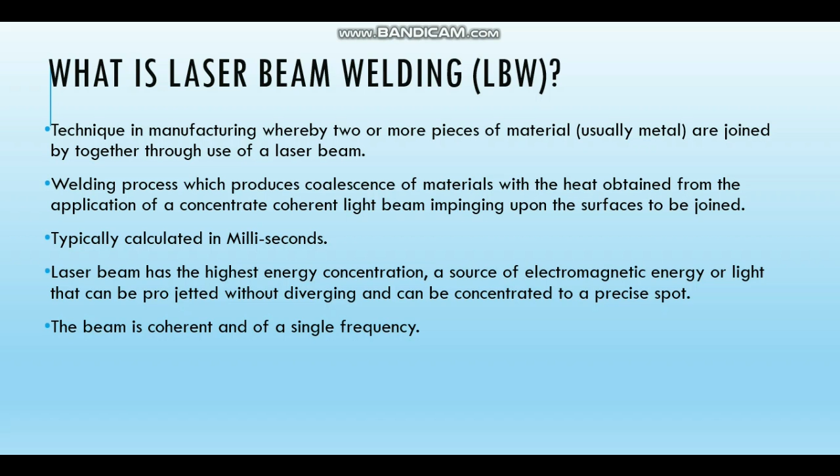So there are three types of laser, which are gas lasers, solid state lasers, and also fiber lasers. So what is a gas laser? It uses a mixture of gases as the laser medium to produce laser. Some of the examples are nitrogen, helium, and also carbon dioxide gases. It is the most conventional gas laser medium used because it is cheaper compared to the other types of laser medium.

So the second one is solid state laser. Solid state laser uses several solid media such as synthetic ruby crystal, neodymium in glass, and also neodymium in yttrium aluminum garnet as the laser medium to produce laser. So the last one will be fiber laser, and this type of laser medium will be the optical fiber itself.

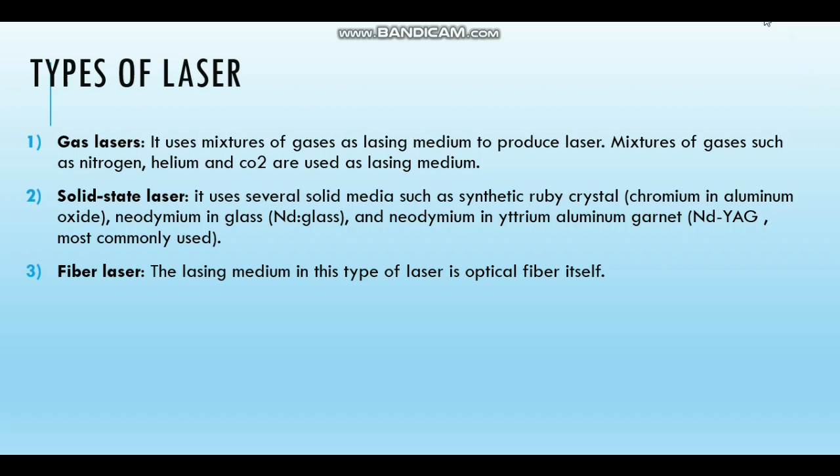So now let's talk about the characteristics of the laser beam welding technique and also its related applications. We know that the power density of the laser beam is very high, which is in the order of 1 megawatt per centimeter square. So due to this high energy density, it has small heat affected zones, causing it to have a high rate of heating and cooling.

So the laser beams produced are coherent, which have the same phase, and also monochromatic, which comprises the same wavelength. It is usually used to weld smaller size spots, but the main thing is the spot size can be varied from 0.2 mm up to 13 mm.

So you can see that the depth of penetration of this laser beam depends upon the amount of power supply and also the location of the focal point. It is proportional to the amount of power supply. Focal point is also another factor that affects the depth of penetration. When the focal point is kept slightly below the surface of the workpiece, the depth of penetration is maximized.

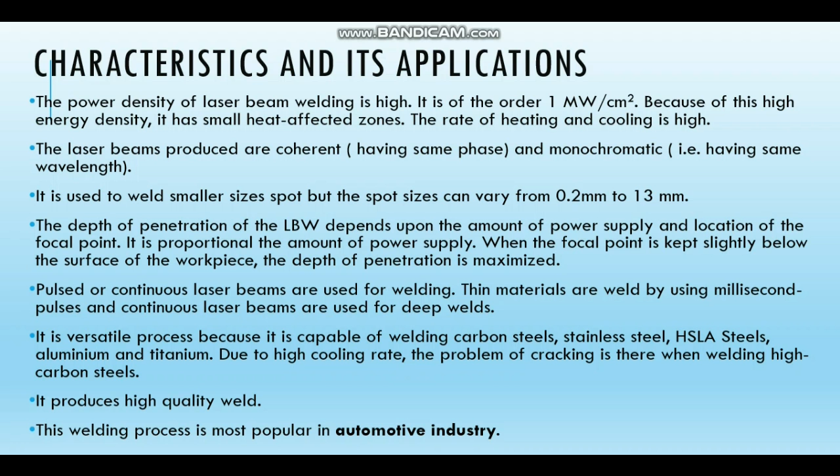So pulsed or continuous laser beams are used for welding. Thin materials are welded by using millisecond pulses, and continuous laser beams are used for deep welds. It is a versatile process because it is capable of welding carbon steels, stainless steels, high-strength low-alloy steels, aluminum, and also titanium. Due to its high cooling rate, the problem of cracking arises when welding high carbon steels. Undeniably, it produces high quality welds, and this process is most popular in the automotive industry.

So now I would like to explain the main components of the laser beam welding machine. This laser machine is a machine used to produce laser for welding. There are a few main components of the laser machine that will be explained. The first part is the power source. In this compartment, a high voltage power source will be applied across the laser machine to produce a laser beam in its lasing medium, such as I explained before: gas laser, solid state laser, and also fiber laser.

So the second part will be CAM. What is CAM? CAM is computer aided manufacturing. This is where the laser machine is integrated with computers to perform the welding process. All the controlling actions will be controlled by CAM, so it will speed up the welding process to a greater extent compared to manual control.

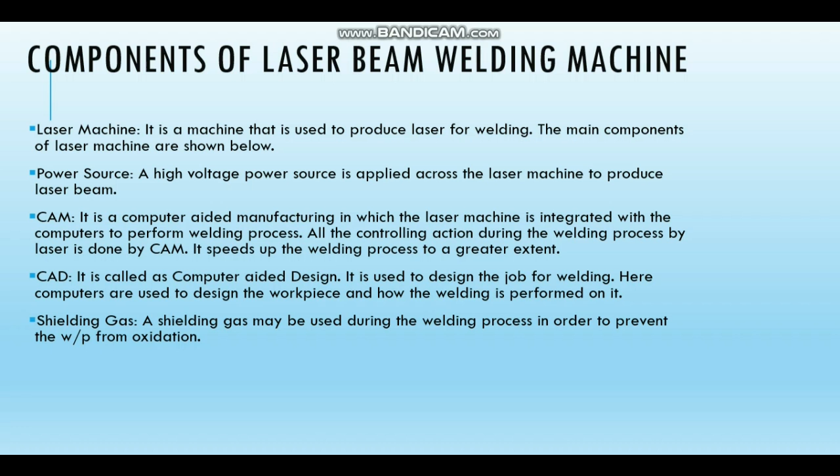So the other part will be CAD, known as computer aided design. It is a program similar to CAM. It will be used to design the job for welding. The computer will be used to design the workpiece that we desire and also how the welding process will be carried out. So the last one will be shielding gas. Shielding gas will be used during the welding process in order to prevent oxidation.

So I guess everyone will be wondering how the laser beam welding machine works. As we can see, the ruby crystal is one of the components of this laser beam machine. So it indicates that it uses a solid state laser as the source of the laser. We can see that the setup of this machine at the desired location in between the two metal pieces to be joined is done.

So after this setup, a high voltage power supply is applied on the laser machine, exciting the laser such that electrons held within the atoms are elevated temporarily to higher energy states.

So after that, the electrons held in this excited state cannot remain there indefinitely and drop down to a lower energy level. So in this process, the electrons lose their excess energy gained from the pump energy by emitting a photon. This is known as spontaneous emission, and the photons produced by this method are the seed for laser generation.

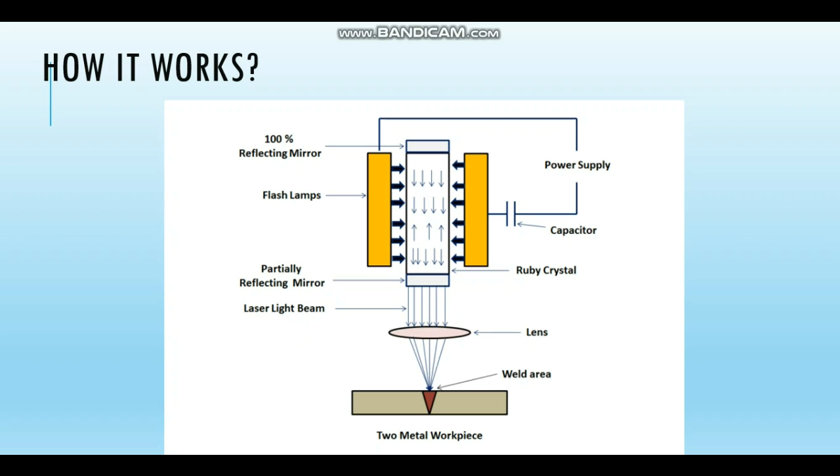So in order for the amplification to occur, there must be a greater percentage of atoms in the excited state than the lower energy levels. This population inversion of more atoms in the excited state leads to the conditions required for laser generation. So the focus spot of the laser is targeted on the workpiece surface, which will be welded. Yeah, this is the weld area on these two metal workpieces.

So at the surface, the concentration of light energy converts into thermal energy. This heat will cause the surface of the material to melt, which progresses through the surface by a process called surface conductivity. In this case, CAM will be used to control the motion of laser and workpiece table during the welding process. The beam energy level is maintained below the vaporization temperature of the workpiece material.

So what is the ideal thickness of this material? As we know, the ideal thickness to be welded should be less than 20 millimeters. So the energy will be the concentrated laser, which is an advantage when working with materials that have high thermal conductivity.

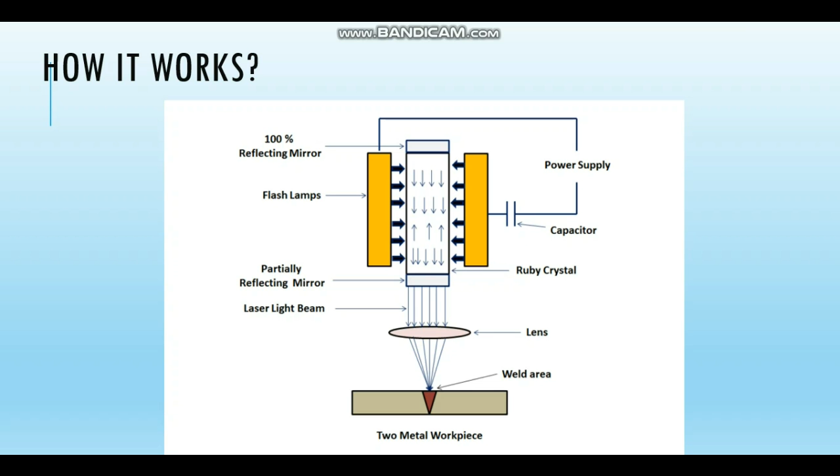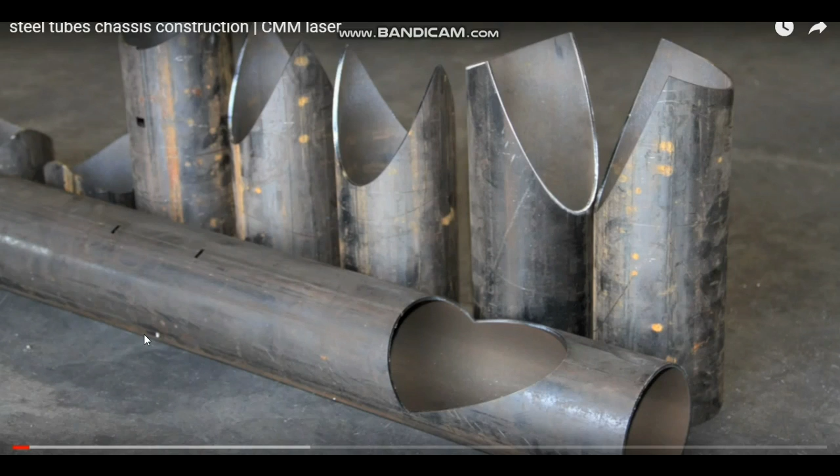So now I'd like to show a video which is a steel tube chassis construction using laser beam. So let's check it out. So these are the steel tubes which are to be constructed.

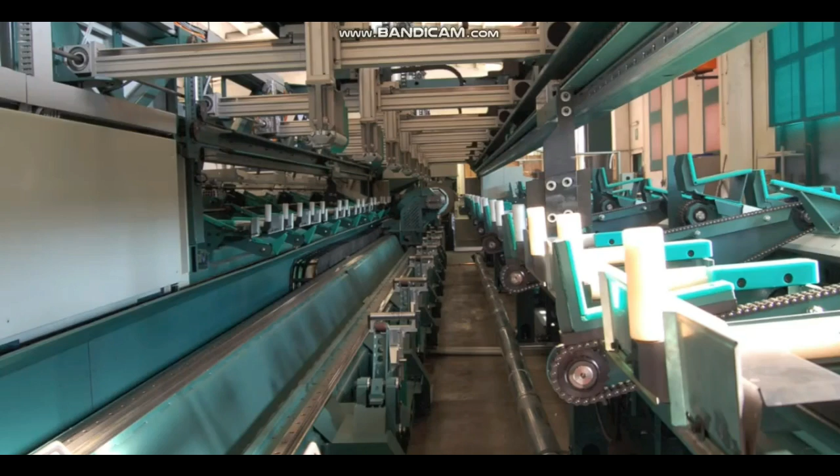So these are the large laser cutting machines which are fully automated.

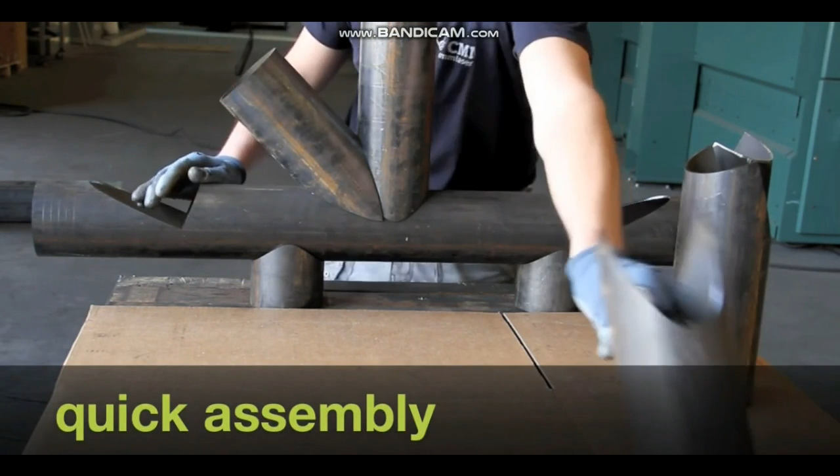So we can see that there's an assembly of this metal compartment which is yet to be welded later with laser beam.

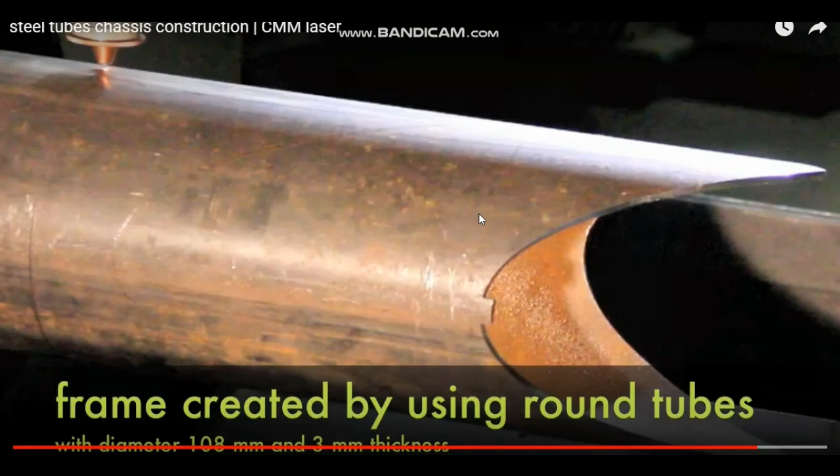So now I would like to talk about the advantages of this laser beam welding technique. Firstly, it produces high weld quality, and secondly, it can be easily automated with robotic machinery for large volume production, as you can see in the video that I presented just now. There's no electrode required, no tooling required, because it is a non-contact process.

The time to weld a thick material is reduced compared to other conventional welding techniques. It is capable of welding in areas which are not easily accessible. It has the ability to weld metals with dissimilar physical properties. The most important advantage of LBW is that it can weld through air and no vacuum is required, compared to electron beam welding, which produces X-rays. So of course X-ray shielding is also not required.

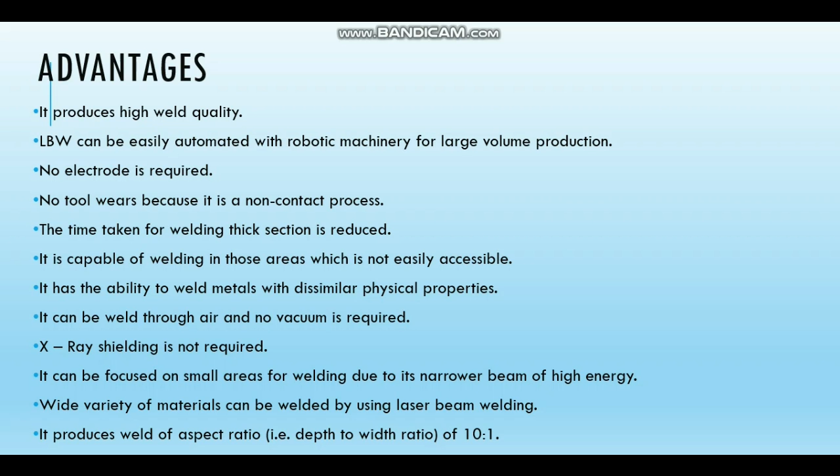However, there are also some disadvantages: it requires high initial and maintenance costs. As I explained just now, cracks may be produced in some metals due to the high rate of cooling. One example of this kind of metal is high carbon steel. In order to operate this machine, we need highly skilled labor and officers to perform the operation of this kind of machine.

The welding thickness is also limited to not more than 20 millimeters. This is one of the main constraints whereby this technique cannot be used to weld thick wall materials. And the last thing is the energy conversion efficiency is very low, usually below 10%. Meaning that if you give an input of 100 watts of power, at the end you might get maybe 7 to 8 watts. So it is a very high energy consumption welding technique.

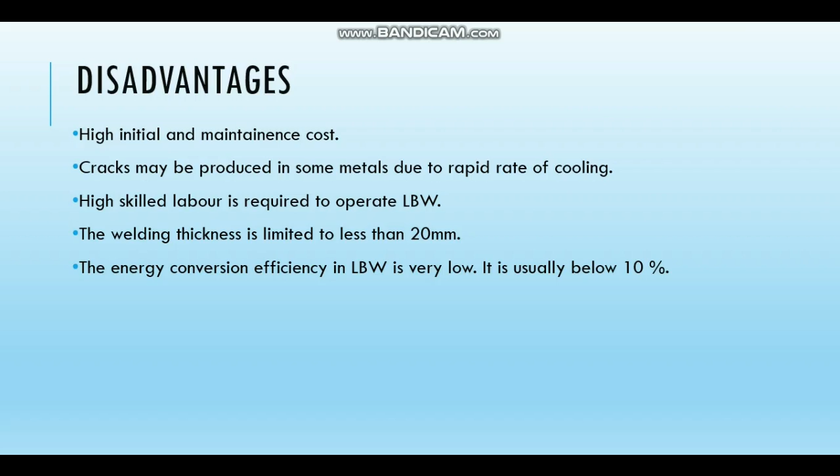So that's all for my explanation on laser beam welding technique for today.